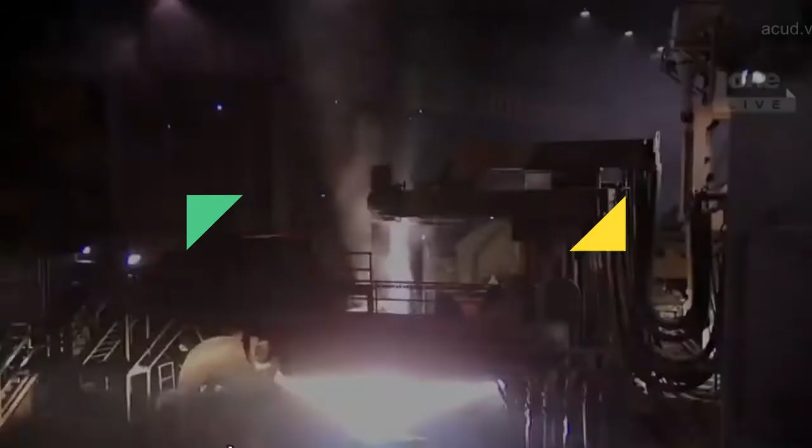It's one of the strongest materials on Earth. It has changed the course of history, shaping our civilization and the way we live.

Steel is the critical breakthrough behind three icons of American architecture: the Brooklyn Bridge, the Gateway Arch, the Empire State Building. But today, scientists are re-engineering steel's molecular structure, creating new forms with the potential to build higher, further, and stronger than the world has ever seen.

Now, go inside the science of steel.

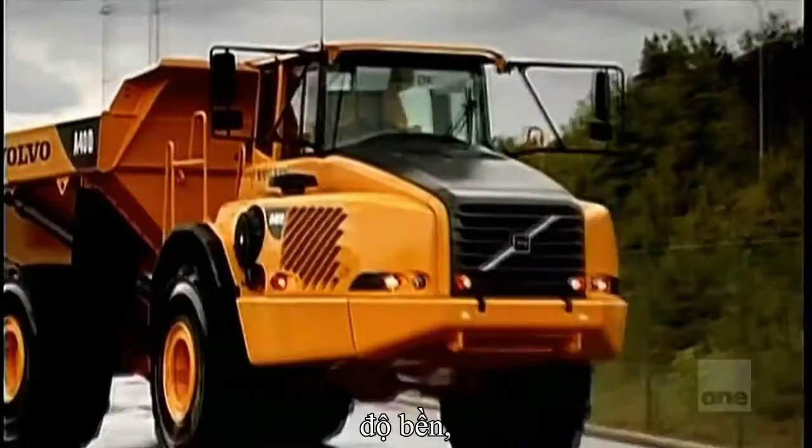Versatile, durable, flexible. Steel is a cornerstone of the modern world.

If you think steel isn't essential in your daily life, think again. Steel has impacted our lives in a lot of ways that we take for granted. Almost everything you use - you wake up in the morning, you turn on your faucet, you think of the toaster oven you use - but it's all steel that you're touching. The automobiles we drive, airplanes, ships, all these things are made out of steel. I would ask anyone who's not sure of the significance of steel to look around in their daily lives and count the number of times they touch steel in a 24-hour span.

The world produces nearly 1 billion tons of steel every year. This material's unique characteristics give it uncommon versatility. Steel can propel a high-rise into the clouds as easily as it keeps food preserved. Its applications are vast and varied.

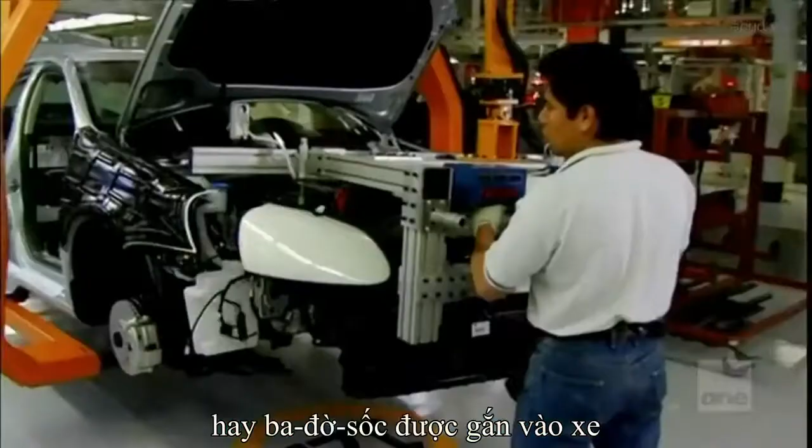Steel is a wonderful material, a lot of flexibility, and steel's design and use is only limited to the imagination of the human mind. But before skyscrapers soar, before a surgeon wields his scalpel, or a bumper is fastened to a car, steel must be created.

Unlike silver or gold, steel is not a naturally occurring element. In order to create steel, man must step in.

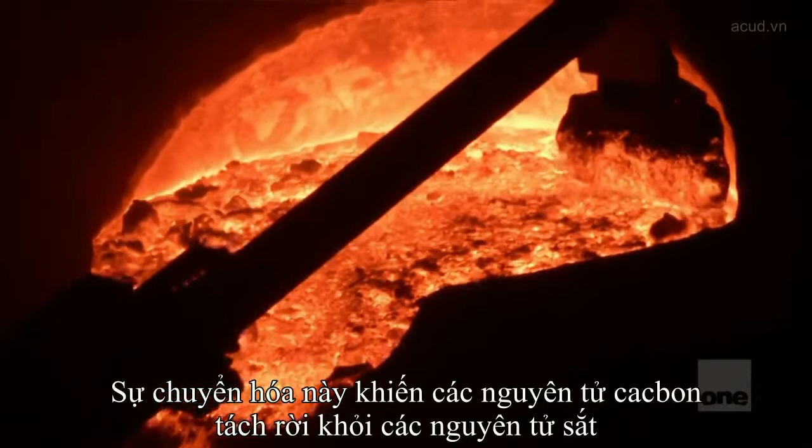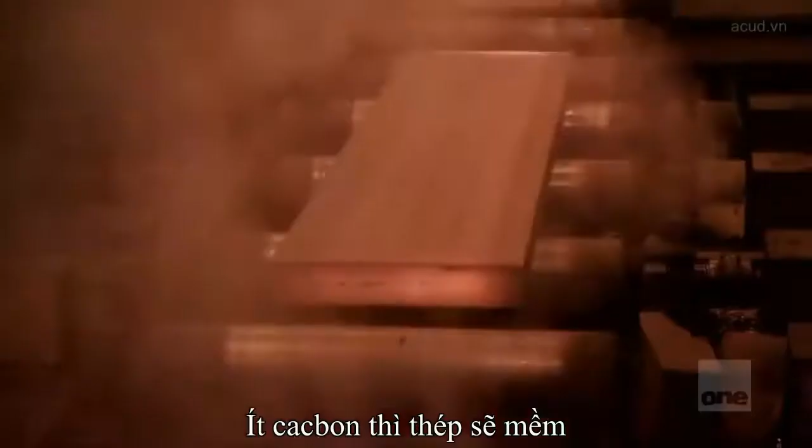Steel is made by changing the levels of carbon in iron. By heating iron to at least 2,800 degrees, it changes from solid to liquid. This transformation forces carbon atoms to separate from iron atoms. The result? Molten liquid. But the carbon-to-iron ratio must be exact. Too much carbon will make it hard and brittle. Too little carbon, and the steel will be too malleable and unable to support weight.

The driving force behind the production of steel is the steel mill. All across the globe, mills manufacture steel that will shape our world. Probably the most difficult thing that people may not understand is exactly how the steel product is made.

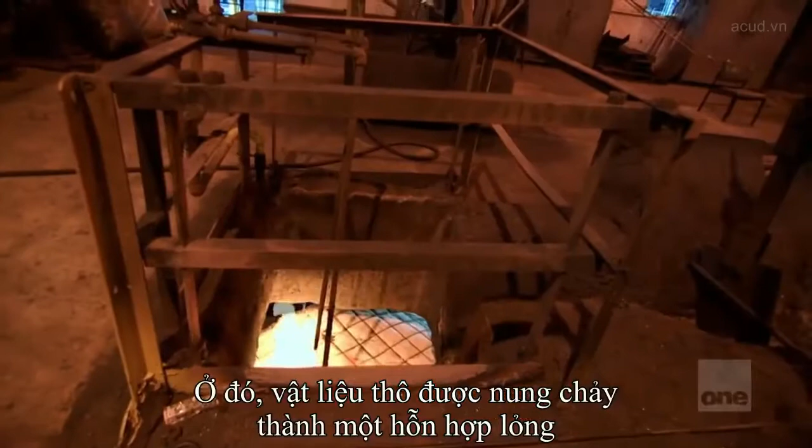It all begins with iron ore, taken from mines and brought to the heart of the steel mill, the furnace. There, the raw material is melted down, filling the furnace with molten liquid. And then, the furnace is drained. It takes 8 hours for it to travel through the furnace and come out the tap hole as liquid iron. Then it runs into our iron trough. Our iron trough is like a reservoir.

Once melted, it's treated with blasts of oxygen. Where you're at right now is called the BOP shop, which stands for the basic oxygen process. Basically what happens here is oxygen is injected at supersonic speeds. You're removing all the impurities, leaving you with high purity steel.

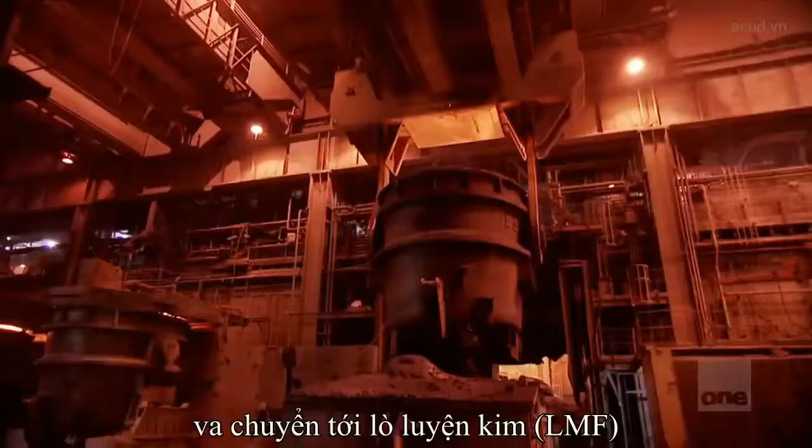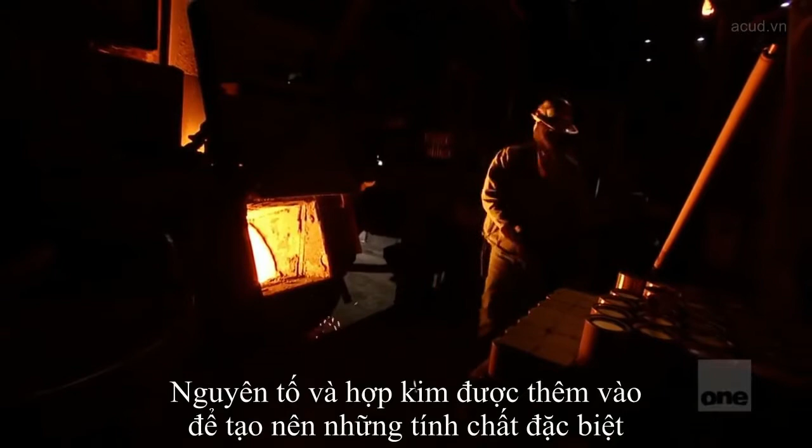The purified liquid steel is poured into a giant container and transferred to the ladle metallurgical furnace, or LMF. This is where the steel is customized to suit virtually any need. Elements and alloys are added to give it specific traits of strength, durability, or flexibility.

Want to build a submarine to withstand 1,000 feet of water and temperatures near the freezing point? Start with tiny levels of carbon and add nickel for maximum resistance to pressure and extreme cold. Looking for a knife to slice effortlessly through a thick steak? Add a little chromium for strong, smooth, lightweight stainless steel.

Need to erect a skyscraper that can stand up to the force of 200-mile-an-hour winds? Add elements including manganese and vanadium for high strength and flexibility.

The amazing thing about steel is that there are almost no limits to it. To engineers and architects, steel is more precious than gold. When it came along, it suddenly opened up possibilities that engineers and architects could only dream of before.

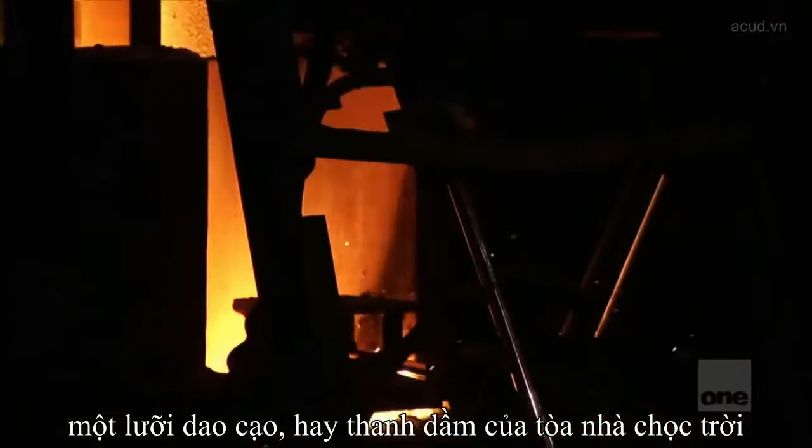Be it a chain link fence, a razor blade, or a beam for a skyscraper, every application has its own recipe.

After leaving the LMF, the precise steel mixture is now poured into vats stretching 15 feet wide and weighing as much as 100 tons. These liquid-filled vessels are then transported to the caster, where steel is given its shape.

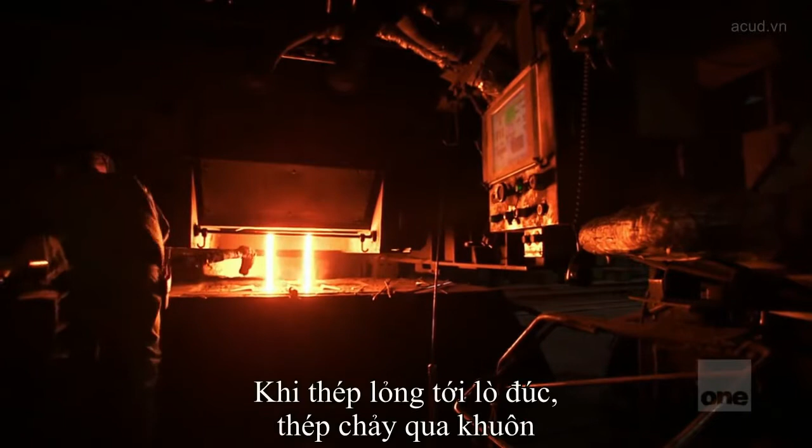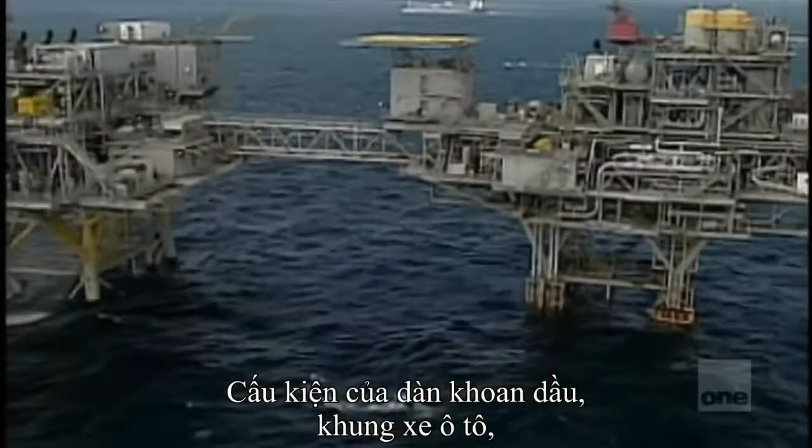As the liquid steel passes through the caster, it is collected by heavy-duty molds. Molds can cast steel into whatever a customer orders. Be it billets for an oil drilling machine, slabs for a car body, or even beams for a sports stadium. You name it, a caster can shape it.

For someone who hasn't seen a steelmaking operation before, the shape that comes out of the bottom of the caster has been described by some people as the old Play-Doh machine that our children used to play with. There's a mold that gives the steel its shape, and as the steel solidifies coming through the mold, it's going to take on the shape of that mold.

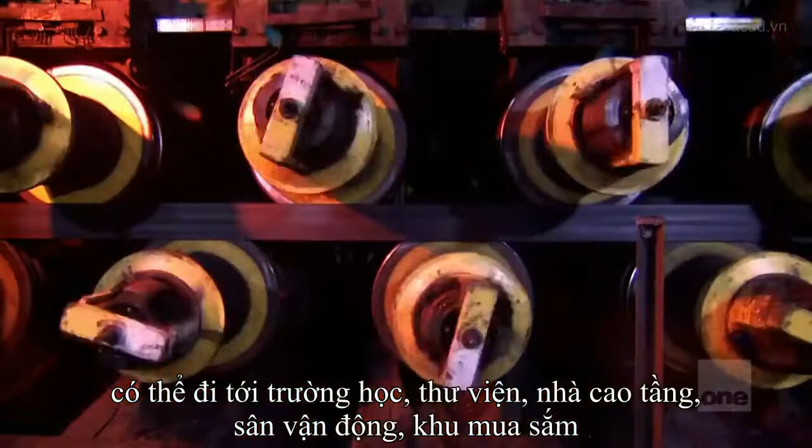Inside the mold, the steel cools and solidifies. The once molten liquid returns to a solid, strong state and is prepared for delivery. So the steel we ship out here on any given day could go into any school, library, high-rise, stadium, or shopping mall.

Steelmaking has been honed over thousands of years. For centuries, no one could consistently heat large amounts of iron to 2,800 degrees, making early steel production unreliable. It isn't until the 1850s that English engineer Henry Bessemer unlocks the technology to make it happen.

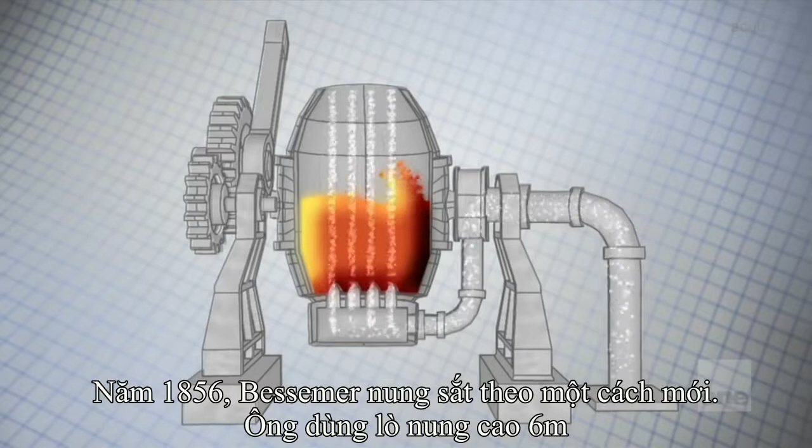In 1856, Bessemer heats iron in a new way. He creates a 20-foot tall furnace and blasts oxygen through holes in the bottom. The oxygen causes the fire inside to surge, raising temperatures to the necessary 2,800 degrees. The extreme heat allows the iron to melt and carbon atoms to burn off. The mass production of steel is now possible.

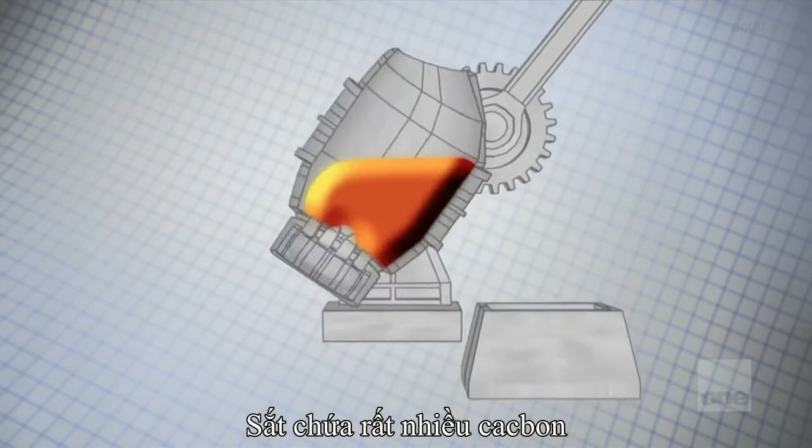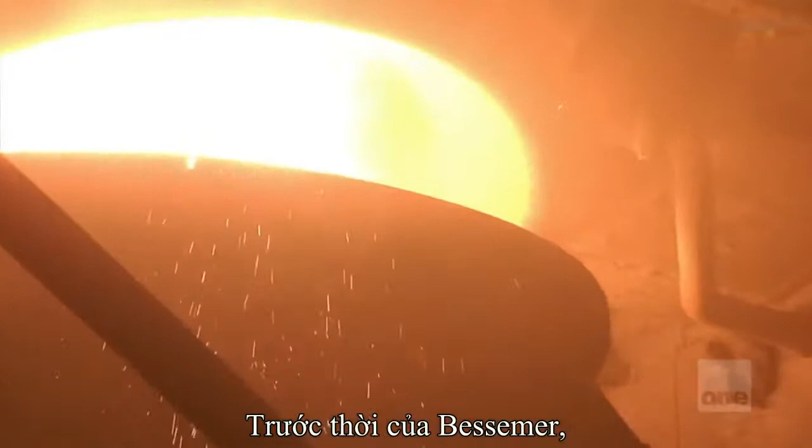Iron contains a lot of carbon. In order to make it steel, there has to be a way of getting the carbon out of the iron and separating the two. Before the Bessemer converter, it took steel workers up to a week to produce a ton of steel. Now they are able to produce the same amount of steel in about 15 minutes.

Almost overnight, the ability to mass-produce steel makes the material widely available. Bessemer's ingenuity comes hand in hand with the Industrial Revolution. Western civilization wants to grow, to find new ways to create infrastructure and expand. Steel could be the answer.

But this breakthrough isn't welcomed by everyone. To some engineers, steel is an unproven material. The 19th century is the age of iron. Iron has given rise to the buildings and bridges that surround them. But one man's faith in steel will prove its strength to the world.

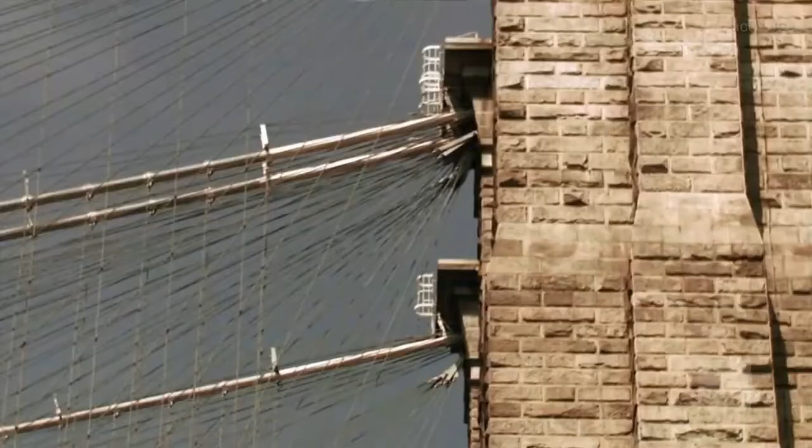This new building material finds an opportunity on the banks of New York City. In 1860, New York and Brooklyn stand on opposite sides of a 1,600-foot divide. They need a convenient thoroughfare for commerce and transportation. To span the East River, they will turn to steel. Stretching 1,600 feet across New York's East River, the Brooklyn Bridge is a landmark in engineering.

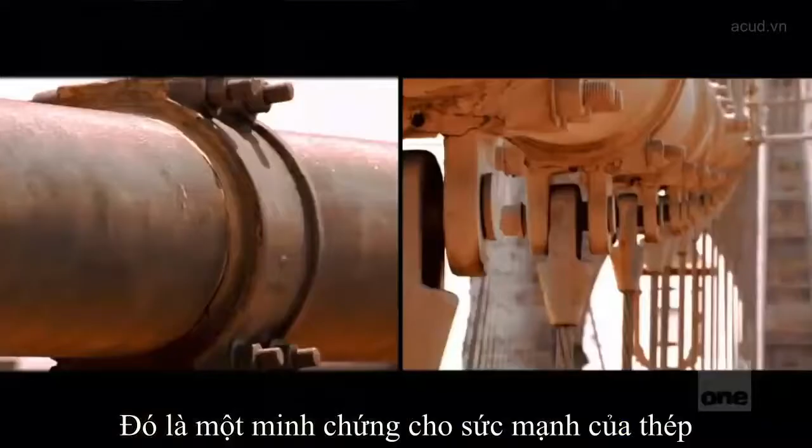At first glance, it may look like stone is the bridge's main support, but it's actually steel that gives this overpass its strength. Rising almost 300 feet into the air, just 4 steel cables suspend an entire roadway high above the water. It is a testament to the power of steel.

The bridge has been a main artery of transportation and trade for over a century. But few who traverse it realize that its construction helped change the world. The Brooklyn Bridge signifies the arrival of a new building material, steel.

New York, 1860. The sky above the East River is empty. The cities of Brooklyn and Manhattan stand on opposite banks, separated by water. The only way across the 1,600-foot divide is by boat. But the boats that ferry commuters and commerce are unreliable.

It often takes more than 3 hours to cross the river, and during the winter, frozen waters can bring traffic to a standstill. Sometimes the river would get iced over, and ferry service would be blocked, so there was no way to get into the city. New York needs a better solution.

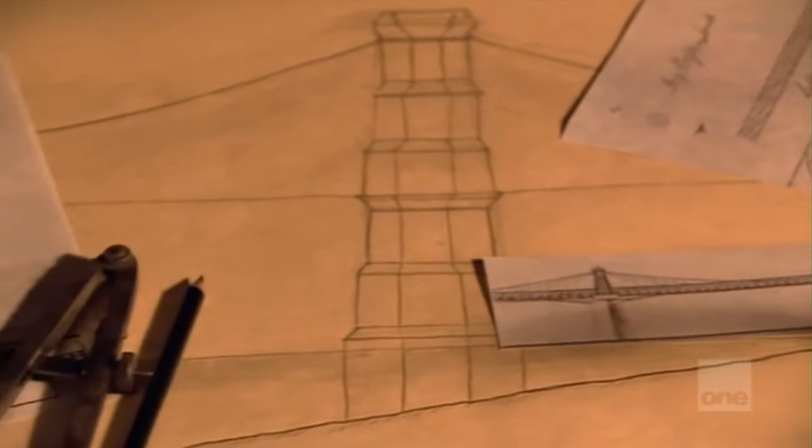For decades, engineers dream of erecting a bridge to unite Brooklyn and Manhattan. But there's a problem. Constructing a bridge out of iron or stone, the popular building materials of the day, means that pillars will have to be placed in the river for support. These pillars will make it impossible for ships to enter New York Harbor from the Atlantic Ocean, crippling commerce. They always wanted to span the East River, but it wasn't possible to do with iron or masonry.

Enter John Augustus Roebling, a civil engineer. In 1867, Roebling produces a design for a bridge many thought impossible. It will span the East River from shore to shore without blocking the shipping lanes. The secret? Steel. Roebling insists steel's relative strength can be spun into heavy-duty cables capable of suspending the enormous bridge high above the river, allowing clear passage for the ships below.

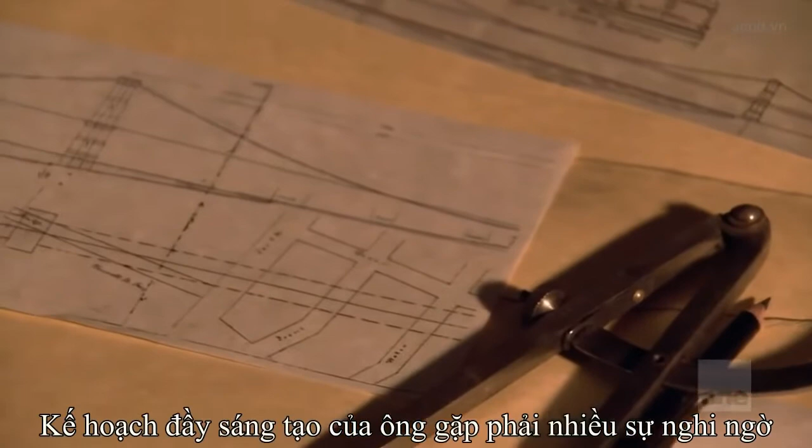The bridge couldn't have been built out of iron because iron wasn't strong enough. Steel is double the strength of iron. His innovative plan is met with doubt. Modern steel is still in its infancy and unproven in large-scale construction. Some engineers doubt its strength.

Engineers knew about steel, but it was entirely unproven when John Roebling first decided to use it. John Roebling was a visionary. Many people thought he was crazy to use steel. People up to that time said it can't be done. They doubted it.

The Brooklyn Bridge really gave birth to the growth of structural steel. That was the beginning. Roebling's proclamation that a bridge suspended by steel can span the East River seems as bold as JFK promising to put a man on the moon nearly 100 years later. The Brooklyn Bridge was a chance to either showcase steel or a chance to end steel's reign altogether.

Roebling knows that steel is the metal of the future. But the city of New York stands in his way. People who lived in the late 19th century had a lot of experience with falling bridges. Bridges fell at an average rate of about 25 a year. It was quite courageous to suggest the use of steel. But it's not just the fear of falling bridges. Politicians express doubt that a bridge spanning the East River is even necessary.

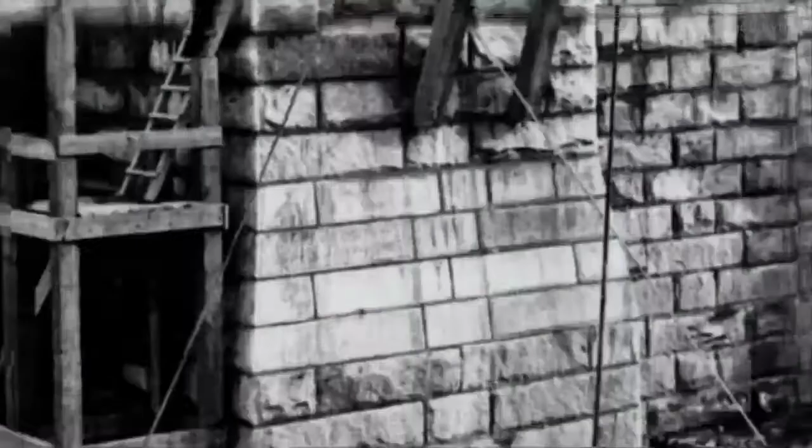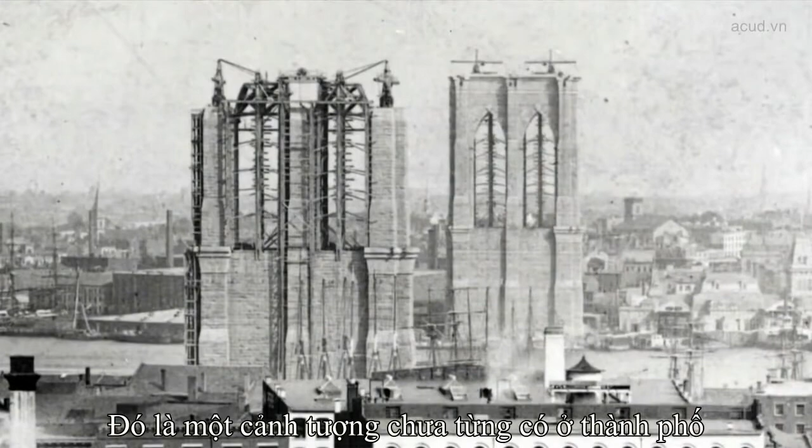By 1869, the political wind in New York shifts and Roebling's design is approved. Construction of the Brooklyn Bridge begins in January 1870. All eyes are fixed on the East River. It is a spectacle the city has never seen, but construction also raises a question: is steel as strong as Roebling believes?

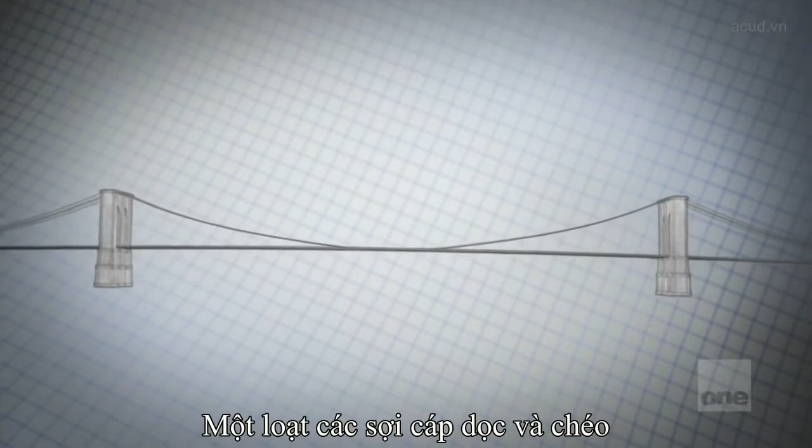Roebling uses 4 steel cables, each 3,578 feet long, to span the East River from shore to shore. The cables will hold the roadway more than 130 feet above the water. A series of steel vertical suspenders and diagonal stays connect the roadway to the suspension cables and hold it in place. 4 suspension cables bear the weight of the roadway.

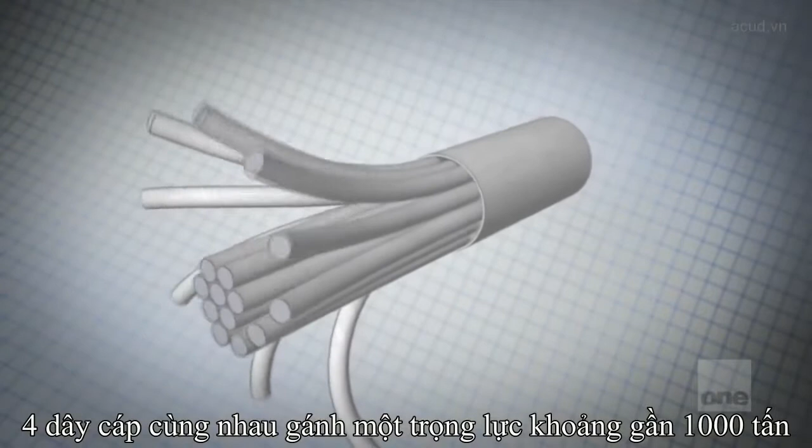There are 19 strands inside each cable, containing 278 wires measuring a mere 3/16 of an inch in diameter. A group of 20 wires measures smaller than the head of a penny. In total, there are 5,282 steel wires inside each suspension cable. Together, the 4 cables can support more than 2 million pounds of weight, roughly the equivalent of 16 Boeing 727s at full capacity. The combined strength of the steel will make the Brooklyn Bridge one of the strongest bridges of its time.

Still, a problem remains. Steel may be stronger than iron, but they share a common weakness: corrosion and rust. The deterioration that plagues iron bridges also threatens Roebling's creation. The solution is a little-known process for protection: galvanization. He encases the bridge's steel wires in a protective zinc coating. The zinc acts as armor against the elements, creating a barrier between the steel and the East River's corrosive sea air.

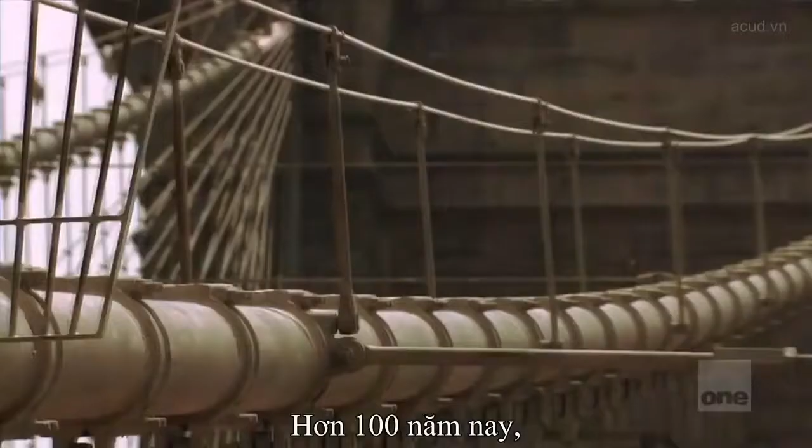In all, 14,000 miles of wire, enough to cross the United States 5 times, weighing almost 7 million pounds, is used in the bridge. Every one of them made from galvanized steel. Over 100 years later, the steel wire is still rust and corrosion-free. The Brooklyn Bridge stands as a testament to the innovation of Roebling's design and the material in which he placed so much faith.

Galvanizing steel makes it impervious to rusting. If those cables in the Brooklyn Bridge were not galvanized, that bridge wouldn't be here today.

Sadly, Roebling will never know the lasting impact of his steel creation. He dies in 1869, the result of an accident at the bridge site. Construction is left to his son, Washington. It will take another 14 years to ensure his father's vision is realized.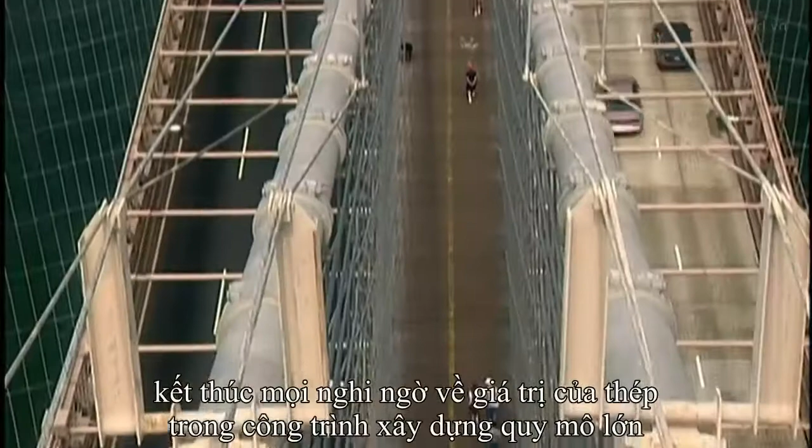Hailed as the 8th wonder of the world, 150,000 people cross the Brooklyn Bridge the day it opens on May 24, 1883. The bridge unites Manhattan and Brooklyn, but it also announces the arrival of the Age of Steel, ending doubts about steel's use in large-scale construction. The Brooklyn Bridge served a very important purpose of convincing people that it was a viable structural material.

The use of galvanized steel in the Brooklyn Bridge is one of the trademarks of its design. Without galvanized steel, it would not exist today. But the Brooklyn Bridge is just the beginning.

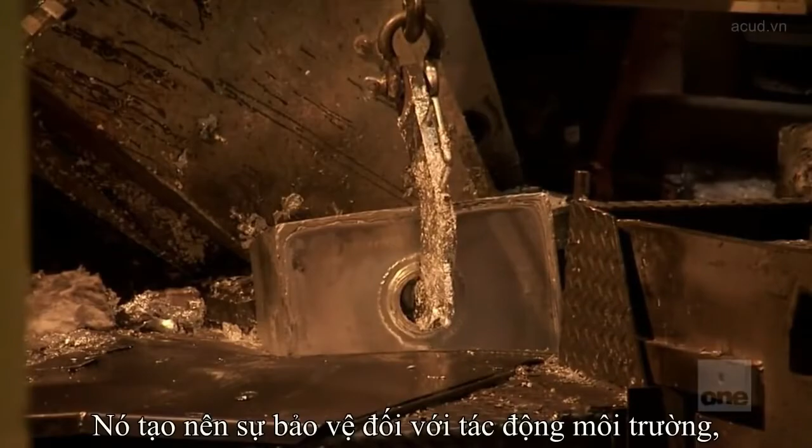Today, galvanized steel is no longer revolutionary, but it is still indispensable. Its coating protects against the elements, making it highly rust and corrosion resistant. Galvanized steel has found its way into everything from cars to electrical cables.

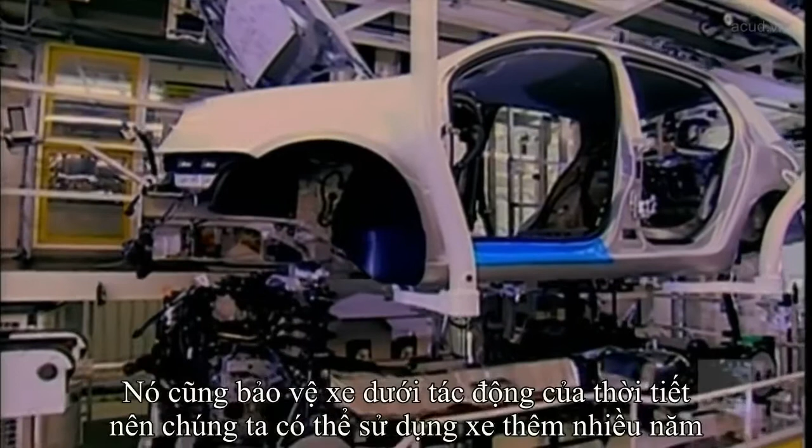Galvanized steel is nothing more than taking our sheet steel and dipping it in a bath of molten zinc. And that zinc on the surface of the steel is what protects your car doors or appliances from rusting. Galvanized steel is primarily used for the automotive industry, and it's used to protect those car bodies from rusting. It protects the cars from the climate, and we get many more years out of them. Today, researchers at U.S. Steel have a new weapon in the quest to improve the galvanizing process: the galvanizing simulator.

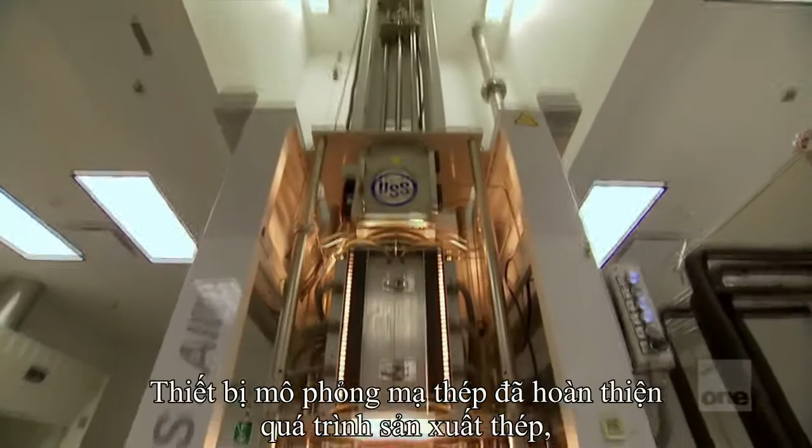Perfecting the steel-making process inside the mill would be expensive and time-consuming. In order to save material and countless man-hours, researchers run experiments on this small-scale model.

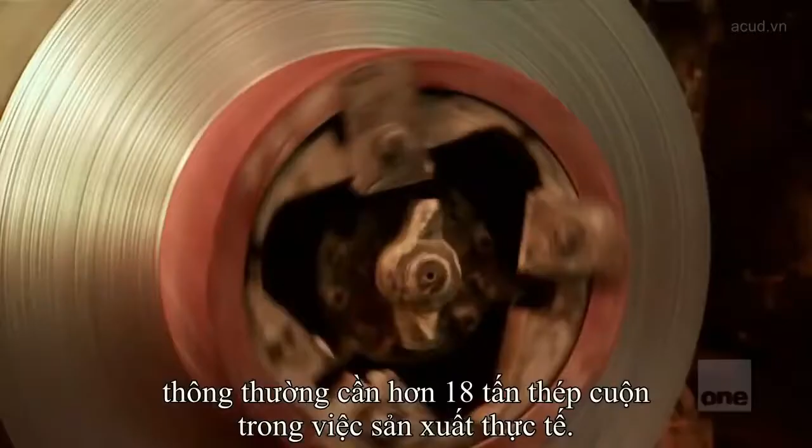The hot dip process simulator allows us to take small samples of steel, put them into a molten zinc bath, and expose them to the same process parameters that we would use on large 40,000-pound coils of steel in our production facilities. The beauty of having the simulator is we could take these process parameters back to our plants and improve the plant process from what we've learned here at the simulator.

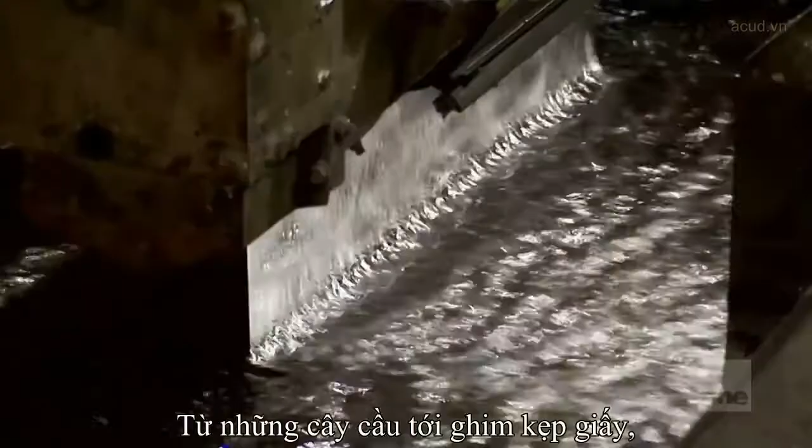Galvanized steel may not be a household phrase, but without engineers researching and improving this steel, we would not have the mailboxes, wiring, and framing we do today. From bridges to paper clips, fenders to doors, galvanized steel is perfect for so many uses because of its smooth surface and superior resistance to corrosion.

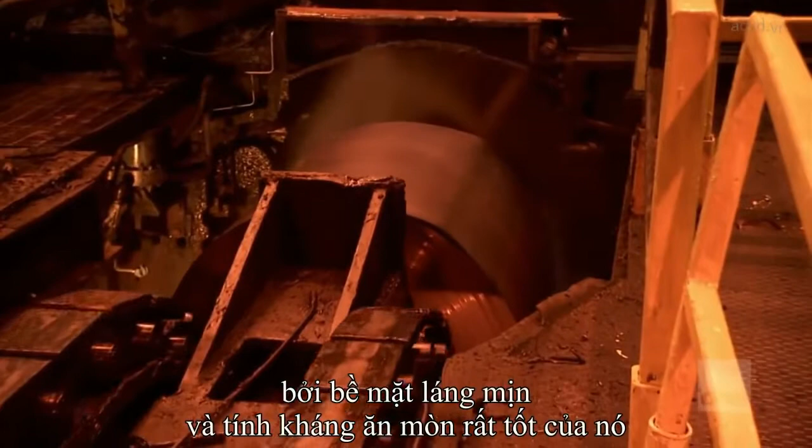In the decades that followed the building of the Brooklyn Bridge, the use of steel spread across America. Steel will alter the landscape by spanning great distances and making skylines soar. This metal gives engineers a new tool to bring innovative designs to life. Now, go back inside the science of steel.

It towers 77 stories above the sidewalks of New York City. It is constructed from 21,000 tons of steel and rises more than 1,000 feet in the air. The Chrysler Building is a grand feat of engineering.

When it opens in 1930, it stands as the tallest building in the world. But this Art Deco skyscraper's crowning achievement is not its height. It's the epic spire that adorns it. The Chrysler Building needs no introduction. You simply walk by it or see it on the skyline, and it sparkles there like a gem.

Its trademark sparkle wouldn't have been possible without one special material: stainless steel. The Chrysler Building is one of the first structures to stretch the use of stainless steel into the world of aesthetic architecture. More than 75 years after it opens, the beautiful Art Deco pinnacle shows no signs of wear. None of its 4,500 stainless steel sheets have ever been replaced.

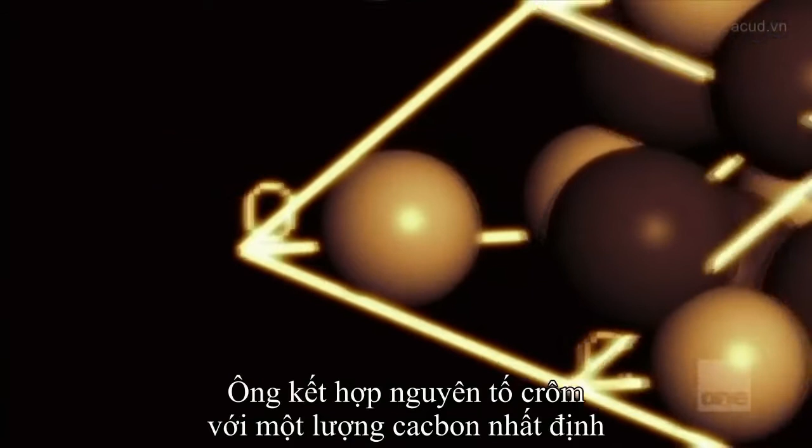England, 1912. Metallurgist Harry Brearley is searching for a way to prevent gun barrels from corroding after repeated firing. When he combines the element chromium with precise levels of carbon, the result is a steel that resists tarnishing and erosion. The secret of stainless steel lies in a film of chromium oxide that encases it.

The film is generated when low-carbon steel is combined with chromium and exposed to oxygen. The film gives stainless steel its powers of resistance. It even has the power to repair itself. If the film is scratched, the exposed chromium quickly reacts with oxygen in the air to rebuild its protective layer.

Unlike the galvanized steel found in the Brooklyn Bridge, stainless steel is not a coating. It is a unique type of steel.

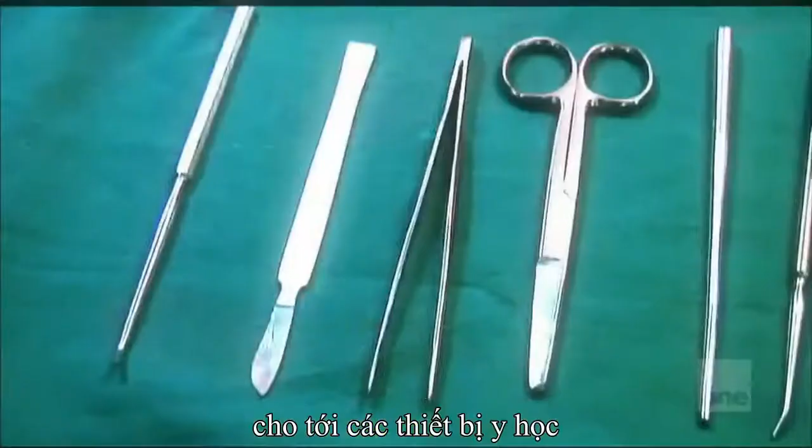Stainless steel's resistance to rust and corrosion has improved life in the 20th century. From everyday items that don't decay after repeated use, to the tools of modern medicine, stainless steel makes many things possible. It's ideal on the small scale, but since its invention, steel has been called upon as a tool of construction. And stainless steel will prove that it is up to the task of being the building block for a new type of architecture.

Completed in 1965, St. Louis's Gateway Arch towers over 600 feet in the air and casts an epic shadow across the American plains. This shimmering beacon is more than a monument to westward expansion its designers envisioned. It's also a testament to stainless steel's potential as an architectural aesthetic.

1963. Engineers and architects want to push the use of stainless steel beyond the spire of the Chrysler Building. They get their chance on the banks of the Mississippi River. They will put this glimmering steel to the ultimate test.

By the middle of the 20th century, people were starting to understand that steel was kind of beautiful. That if you used it in the right way, as it was used in the Gateway Arch, it was very aesthetically pleasing.

The plan for the monument is modern and bold. Architect Eero Saarinen's design is an inverted catenary curve, 75 feet taller than the Washington Monument and over 300 feet taller than the Statue of Liberty. The arch will sweep 630 feet into the air, making it the tallest monument in America. But unlike any of those monuments, the Gateway Arch will have no internal skeleton, no support beams, no trusses.

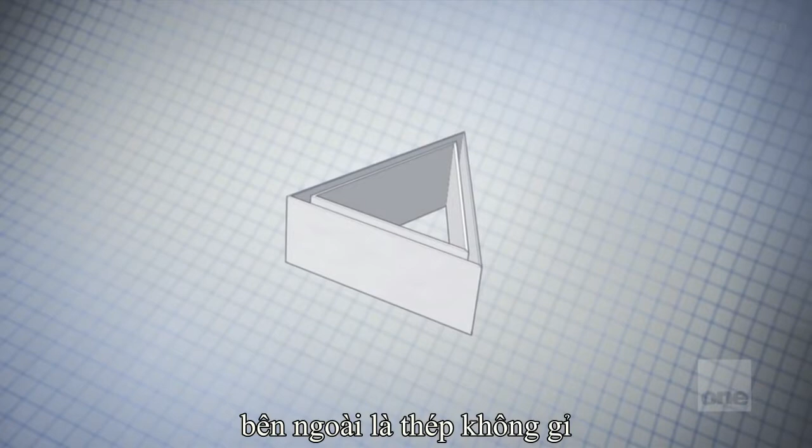The arch will be fashioned from two simple steel skins: an internal skin of carbon steel and an external skin of stainless steel. The steel skins are individually fabricated into double-walled triangular sections, with 3/8-inch carbon steel on the inside and 1/4-inch polished stainless steel on the outside.

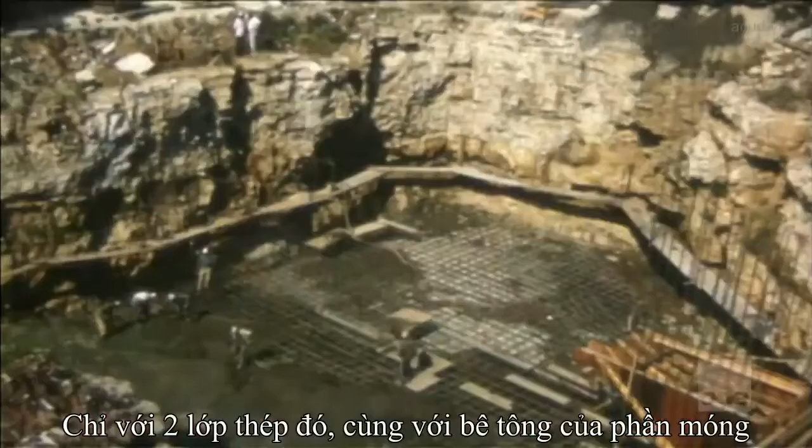142 of these steel triangles will give shape to the arch. Each triangular section is made up of 18 sheets of stainless steel. Just these two layers of steel, along with the concrete fill at the base and a few stiffening rods, is all that will provide support and strength to the massive arch.

The lack of an internal skeleton was something very new in engineering and architecture at the time. There were just a handful of engineers in the country that really understood the type of design that went into it. As construction begins, skeptics suggest the design is flawed. They question whether two slender skins of carbon and stainless steel can support the arch. But Saarinen knows better. Constructing the arch out of iron would make it far too heavy for it to stay up. And stainless steel's unique reflective aesthetic makes it the perfect material to create the arch.

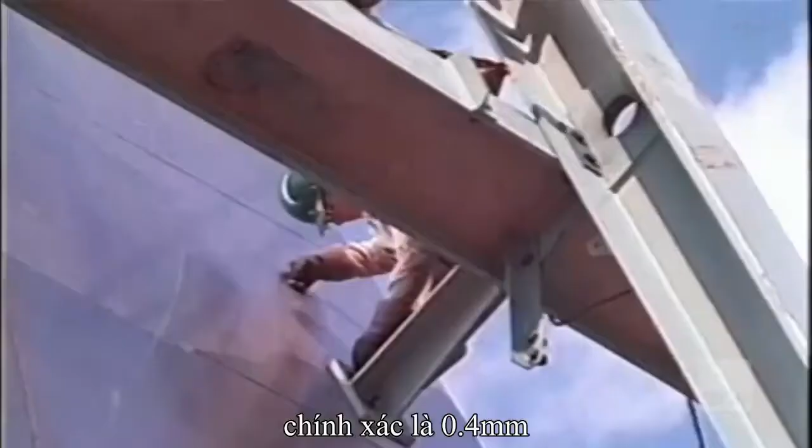But as the arch goes up, builders face a unique challenge. The advanced design of the gateway arch has a shockingly small margin of error, 1/64th of an inch to be exact, about the width of a sheet of paper. If surveyors are off by more than a hair, when the final piece is installed, the two sides will not meet. But taking measurements proves to be difficult.

The stainless steel is so thin that it heats up very quickly in the sun, causing the legs of the arch to expand. This could spell certain disaster for construction, so the engineers come up with a clever solution. Precision was really the key when they were building the gateway arch, and the sun would actually heat up one of the legs and deflect it a little bit. So to make sure their measurements were accurate, they took them in the evening when it was cooler.

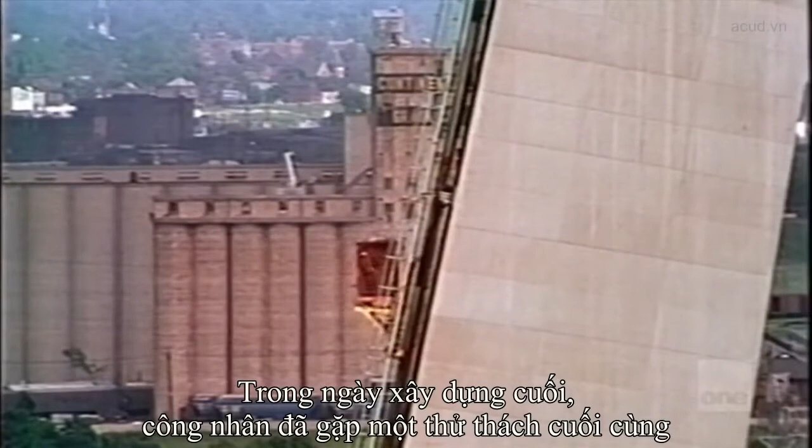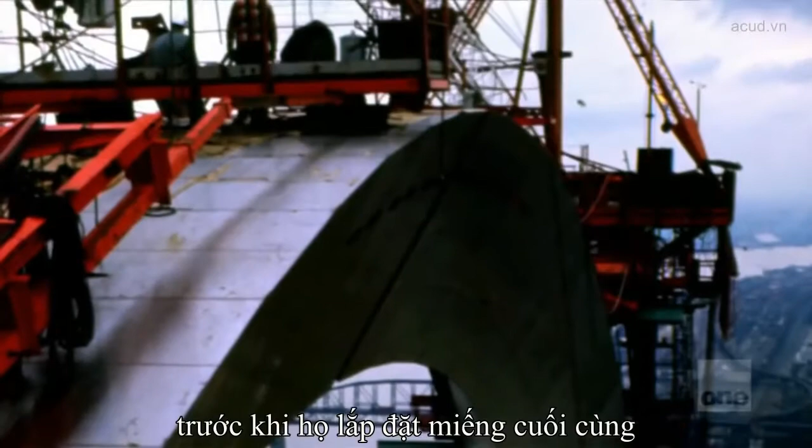On the last day of construction, workers are met with a final challenge. The day starts out at a cool 40 degrees. But as the sun beats down on the south leg of the arch, the steel begins to heat up and expand, so much that engineers worry it will warp before they can set the last piece. Workers quickly hose down the steel with cold water in an attempt to keep it from expanding.

The stainless steel is cooled, and on October 28, 1965, the final keystone section is put into place. The arch, doubted by so many, gleams proudly in the sun. When it was first proposed in the 1940s, most people said it can't be built. And then it became kind of a local joke. It eventually took over as the symbol for the city of St. Louis.

This city's symbol has become one of the most popular tourist destinations in the world. Beyond the stainless and carbon steel skins, the arch houses a steel tram, which transports 6,000 people to the top of the arch each day, offering a unique view 630 feet in the air. With over 900 tons of stainless steel, enough to make more than 14 million pieces of tableware, the arch stands

As a testament to the innovative use of steel, the visitors who come here are kind of blown away to think that the material they're seeing on the outside of the gateway arch is the same thing that's on their dinner table with their forks, knives and spoons. From the dinner table to the operating table to the gateway arch, stainless steel is one of the rare materials that embodies both form and function.

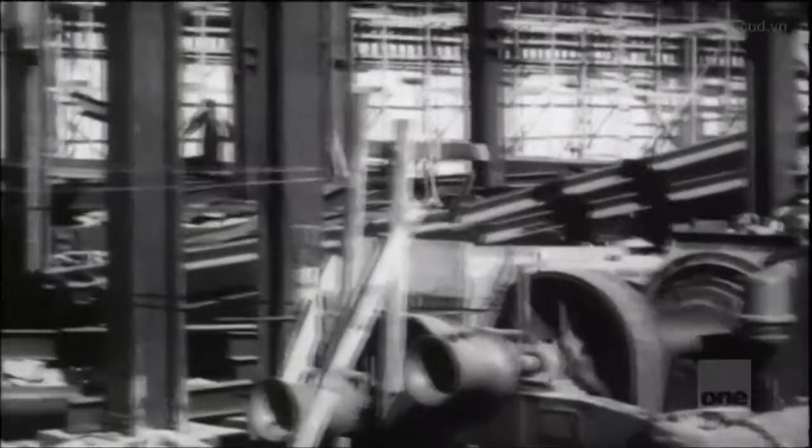January 1930, New York architect William Lamb unveils a plan to erect the tallest building in the world. It will stretch nearly a quarter of a mile above the heart of Manhattan. To propel a building to such heights, engineers need a solid construction plan. They turn to a simple, prefabricated steel grid.

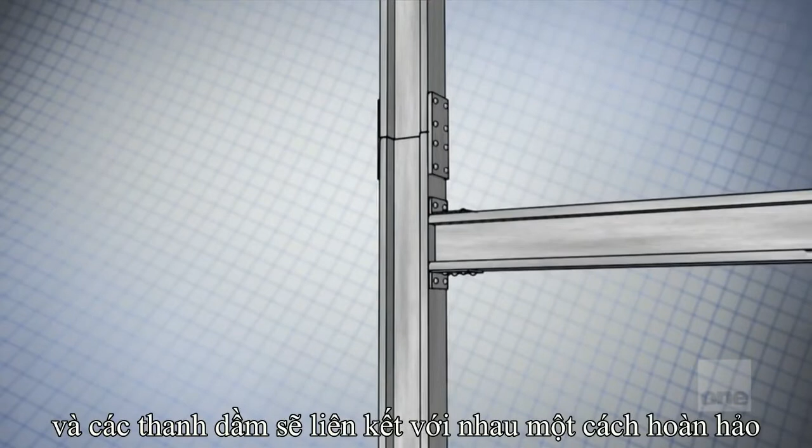To provide central strength, 12 massive steel columns run the length of the building. For ease of construction, the steel beams for each of the 102 floors are designed to similar specifications, meaning each floor resembles the next, and the beams fit perfectly together. The Empire State Building went up like an erector set, allowing builders to do almost what Henry Ford was doing with his Model T. The columns and beams joined very easily, and each floor replicated the floor that came before it.

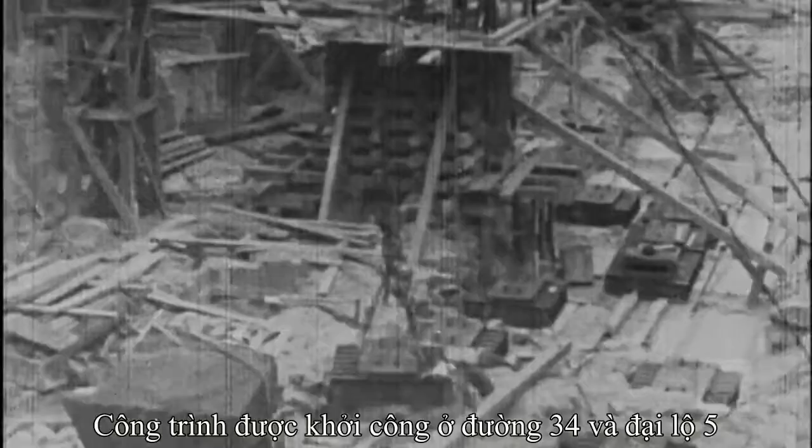Construction begins on the corner of 34th Street and 5th Avenue on the morning of March 17, 1930. To create the building's internal steel grid, 57,000 tons of structural steel will have to be molded into 210 uniform columns. Only the steel capital of the world, Pittsburgh, could fill an order this big.

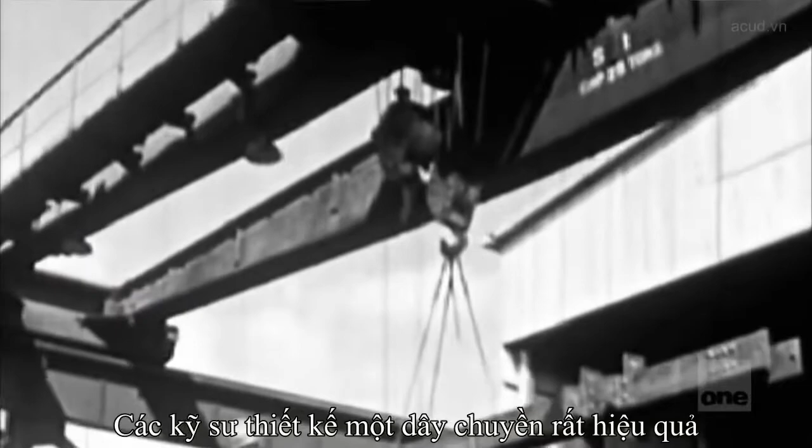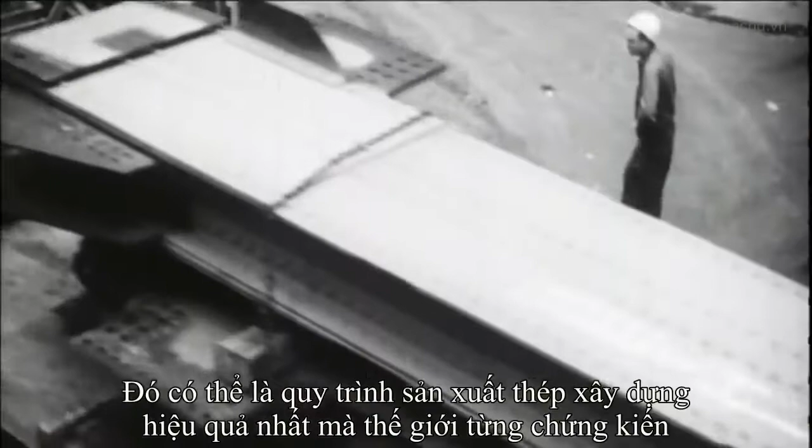The steel beams molded in Pittsburgh must be transported to New York quickly in order to build the skyscraper fast and cheap. Engineers design an amazing assembly line of trains, barges, and trucks that span more than 350 miles and 3 states. From Pittsburgh to the construction site, the entire process takes just 80 hours. Legend has it, when the beams arrive, many are still hot to the touch. It's perhaps the most efficient production of steel the world has ever seen.

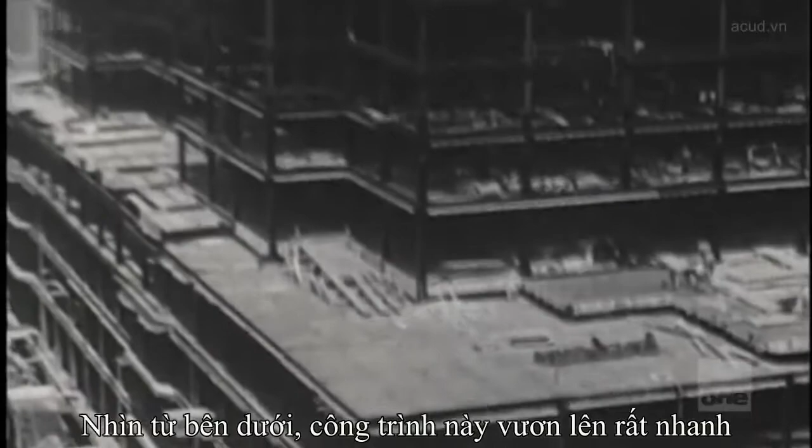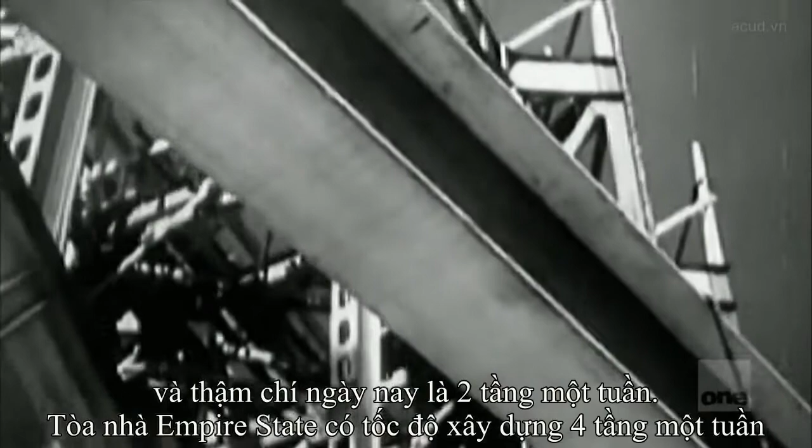Once on site, the steel is immediately raised and riveted into place. Beam by beam, floor by floor, the Empire State Building is erected at breakneck speed. Pedestrians 1,000 feet below marvel at its rapid rise. The Empire State Building went up phenomenally fast. The average rate of buildings before that, and even today, is about 2 stories a week. The Empire State Building averaged 4 stories a week, and at some points 5 stories a week. It's never been matched. Just 13 months after construction begins, workers rivet the final steel beam into place. A simple steel grid has given rise to the tallest building on Earth, and one more durable than anyone imagines.

During World War II, an airplane hit it, and the building took the impact rather easily. It was a sign to people, not only that the Empire State Building was very strong, but a pretty good sign that steel skyscrapers were very strong structures.

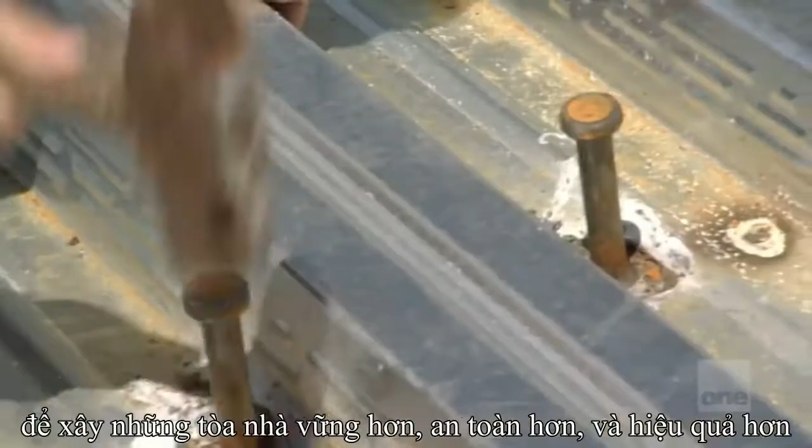In the 75 years since the Empire State Building opened, architects and engineers have constantly sought to refine the process of steel high-rise construction, continually searching for new ways to make buildings stronger, safer, and more efficient. One of the latest advances in steel construction is just 20 blocks from the Empire State Building. Composed from more than 10,000 tons of steel and stretching 46 stories into the sky, the Hearst Tower is one of the newest landmarks in the New York City skyline.

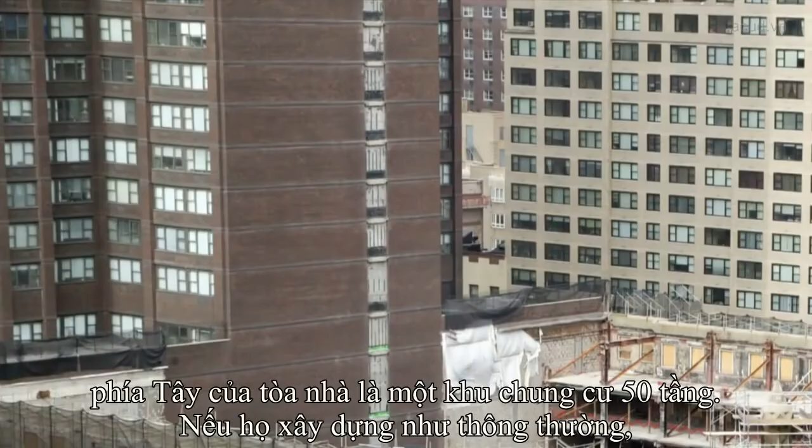In 2001, the Hearst Corporation decides to revamp its 80-year-old 6-story headquarters into a modern tower. But there's a problem: directly to the west is a 50-story residential high-rise. If they build a standard skyscraper, offices on the west side of the building will look directly onto a brick wall. But they can also erect the building another way, with an offset steel core.

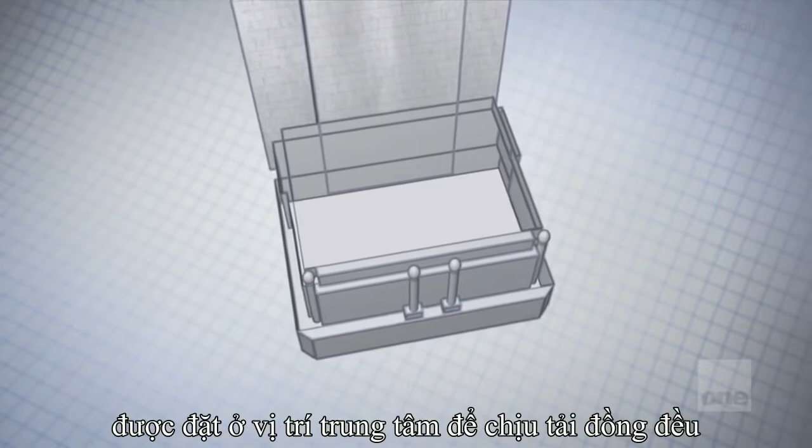In typical high-rise construction, a building's core, which houses elevator shafts, bathrooms, and service areas, is set in the center to bear the load evenly. A centralized core also allows for views on all 4 sides. But with views to the west already blocked, architects opt to set the Hearst core on the west side of the building.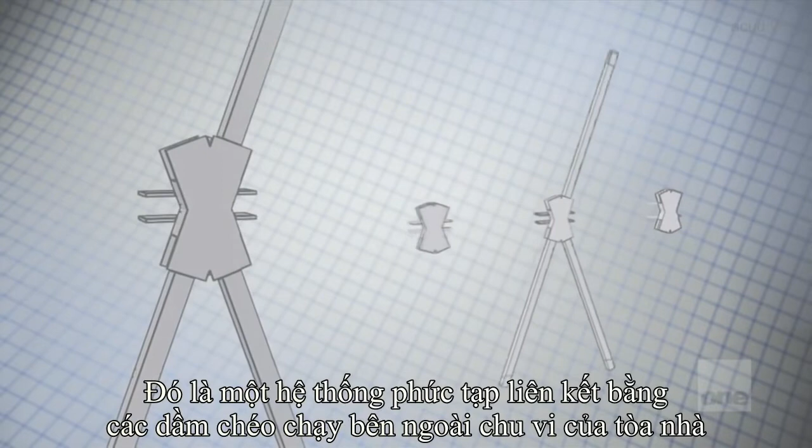But an offset core means the building's weight will be unevenly distributed, so engineers turn to a revolutionary triangular construction design to support the building. It's called the diagrid. Their solution looks like a series of simple triangles, but it's actually a system of intricately connected steel diagonal beams that run the perimeter of the building to support the uneven weight of the tower.

The diagrid provides the same structural support as a traditional internal steel grid, but with the diagrid, the steel skeleton is on the exterior of the building. This external diagonal construction also has a huge economic benefit: it requires fewer steel beams, allowing builders to save 2,000 tons of raw material.

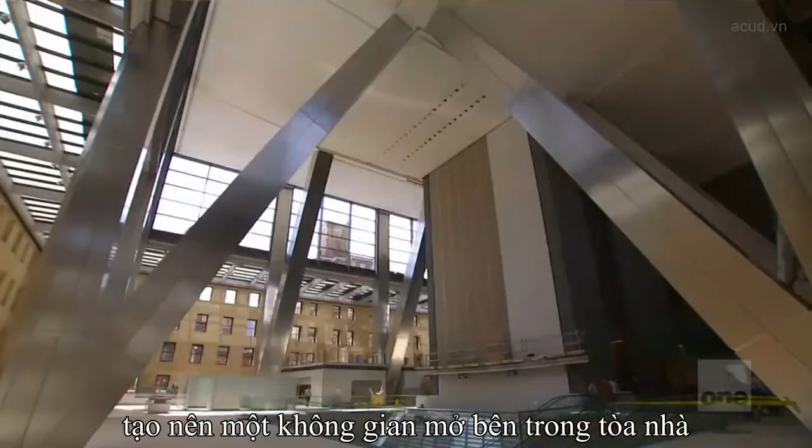But the diagrid is not just revolutionary on the outside of the building. The design also has a huge impact inside the Hearst Tower. With no internal structural beams, there is unobstructed floor space throughout. The Hearst building, because it's not dependent on columns, offers a wide selection of floor space, a lot of openness. There are no vertical elements; the diagrid are the only elements providing vertical as well as lateral stability for the tower. This unique skeleton is a major advancement in steel construction. It takes the internal structure of a building and makes it part of the aesthetic design on its exterior.

The diagrid system on the Hearst building is the first time it's been used in New York City. The diagrid system is very unique, and you don't normally see this type of steel framing system for a high-rise office building.

But the diagrid is not the only ingenious use of steel in the tower. The lobby displays steel at its strongest. The Hearst's old 6-story headquarters is a historical landmark. It could not simply be knocked down to erect the tower. Architects chose to incorporate it into the new building, turning it into the lobby and atrium of the new high-rise.

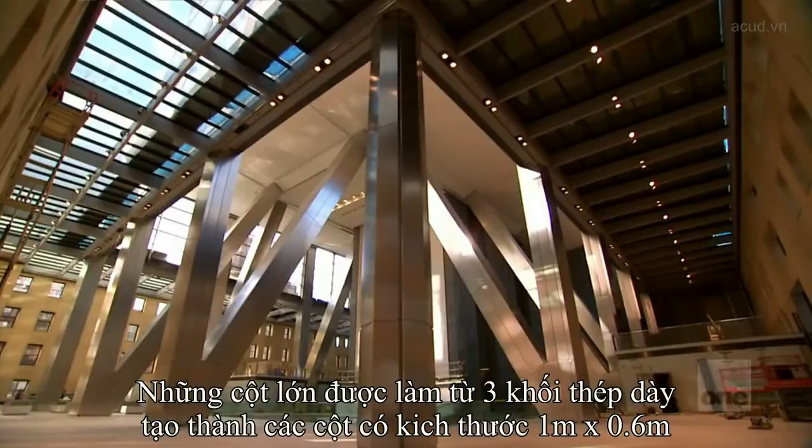Engineers employ several massive mega columns of steel for support. The beams literally brace the 850,000 square foot tower on top of the historic building. Mega columns are made up of 3-inch thick steel plates, 3 foot by 2 foot square box columns. Mega diagonals are the diagonal columns that really brace the core of the building from the 3rd floor up to the 10th floor and give the architect the advantage to create that open atrium space.

The Hearst building once again displays steel's ability to revolutionize construction. The beauty of it really has attracted everybody's eye in New York. And that's very innovative, and it is showing a new way to build a building.

For more than a century, steel construction has evolved to erect buildings that are stronger, higher, and pioneering. Now, go back inside the science of steel.

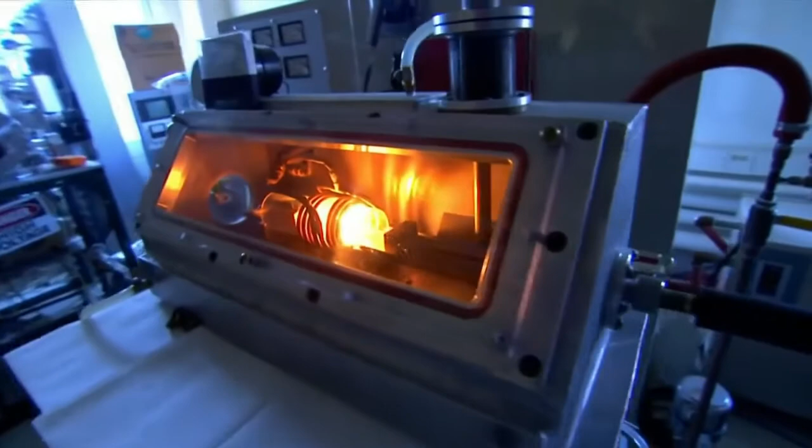At the University of Virginia, materials scientists Gary Shiflett and Joseph Poon are developing a new type of steel. It is stronger than anything that has come before.

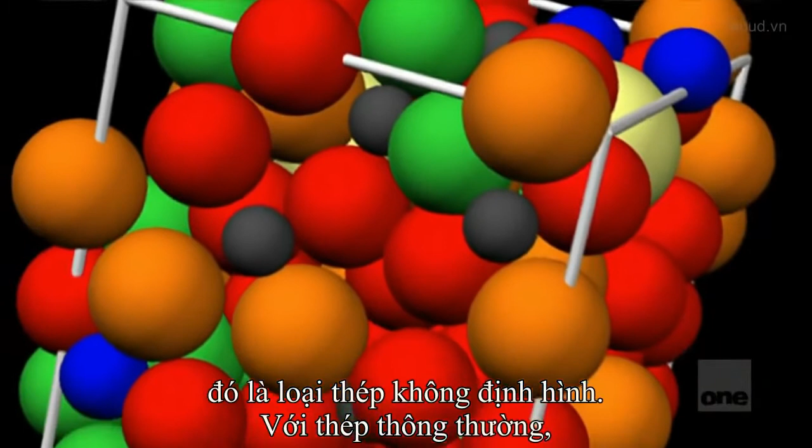Darva glass is made by combining iron and carbon with various elements, including molybdenum and boron. Darva glass is something completely unique. It is an amorphous steel. In traditional steel, atoms are packed together like crystal, with a uniform molecular structure throughout. But in amorphous steel, atoms are packed randomly like glass, meaning each cross-section is different than the one before it. This jumbled atomic structure produces a stronger steel.

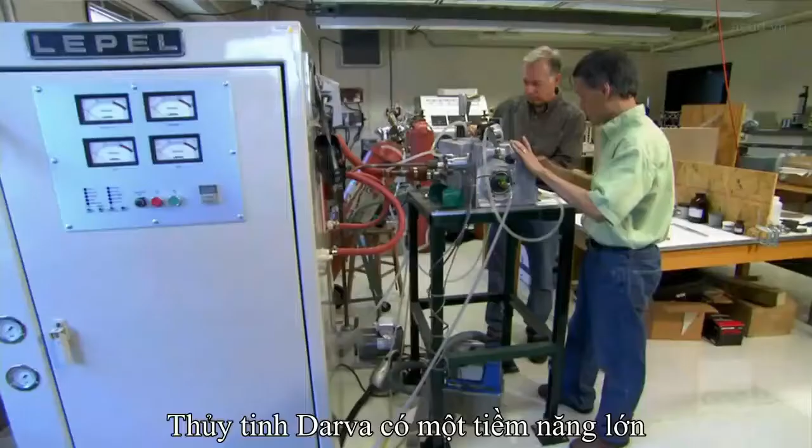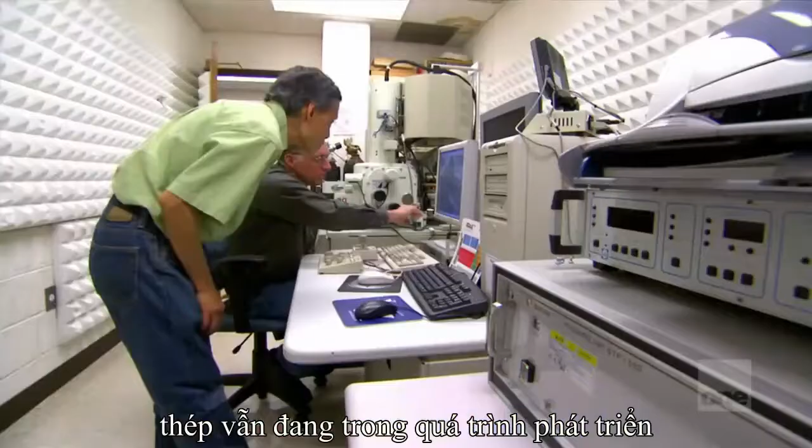Like the invention of stainless steel nearly a century before, Darva glass is a potential landmark. Until this steel was discovered, most people felt that steel development had been exhausted. What this new steel does is fly right in the face of that and show that there are revolutionary improvements that have been obtained, and they exist now.

But Darva glass has a crucial flaw. It's brittle. While most traditional steel has the ability to expand and contract under force, Darva glass does not. It can't bend. When it encounters extreme force, it simply breaks.

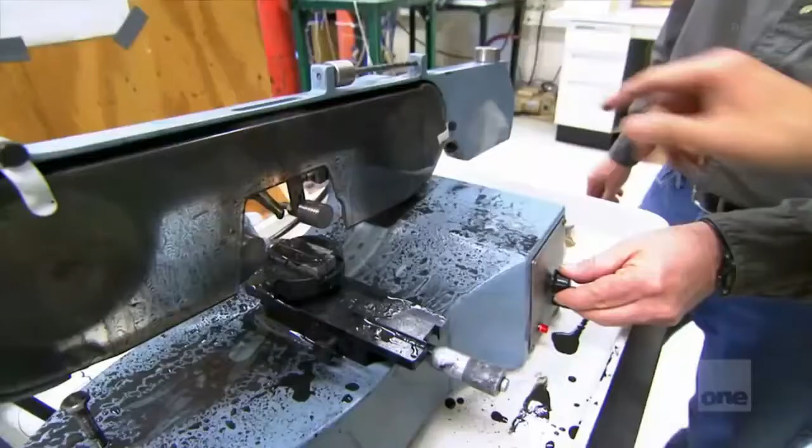Shiflett and Poon are hard at work to correct this limitation. The brittleness is a bit of a mystery, and so Joe Poon and I had to work on the science of these materials, which elements to add so we can change the chemistry but preserve the high strength and also try to get some ductility or damage tolerance in these materials.

If they can find a solution, the potential of Darva glass could be limitless. These materials can make buildings that are stronger, bridges. They could be made longer without supports where high strength is needed or high corrosion resistance needed, and they will be commonplace. Could Darva glass bring new skyscrapers that will dwarf the Empire State Building?

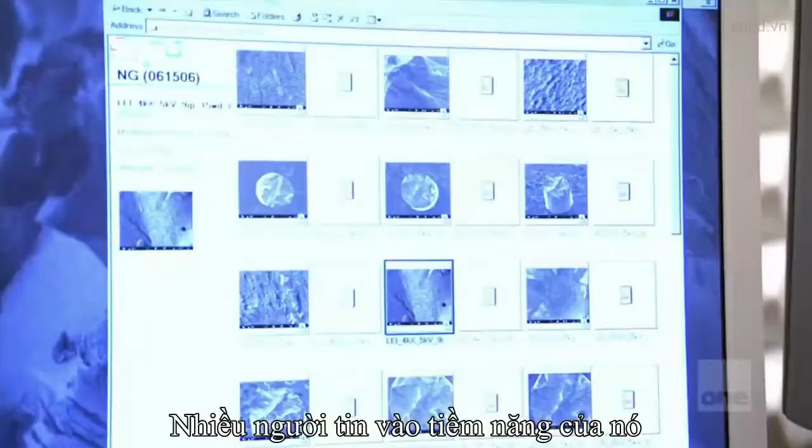Could it provide strength for bridges to span unimaginable distances? Will this new material revolutionize the world? Some believe it has the potential. Even now, in its limited capacity, Darva glass is already searching for applications. It is currently being tested at the Yucca Mountain Repository as a possible sealant for nuclear waste containment.

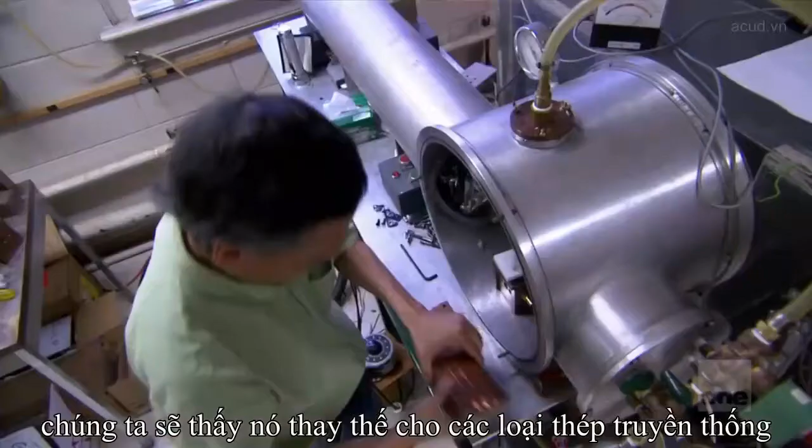This new steel has great future. We can see that it will replace all the conventional steels. If it's not in 1 decade, it will be in 2 decades.

It has only been 150 years since Henry Bessemer made the mass production of steel possible. In that short time, steel has reshaped human civilization. From epic architecture to those seemingly ordinary items we take for granted, the steel revolution has stretched the possibilities of human imagination and redefined our lives.

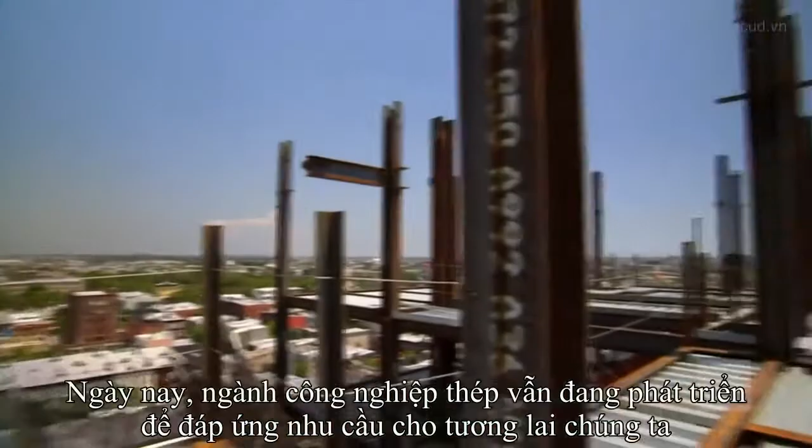Today, at the dawn of a new century, the steel industry is responding to the demands of our future. The steel industry 20 years from now will also be markedly different from the steel industry of today. We're constantly working to reduce the amount of energy it requires to make the steel and also to find ways to recycle and reuse the byproducts of the steel making process.

The one constant about steel is that man drives steel to continuously evolve. And if we've learned anything, it's that the story of steel is far from over. The innovative design and the innovative uses that we have found for steel is one of man's greatest achievements.